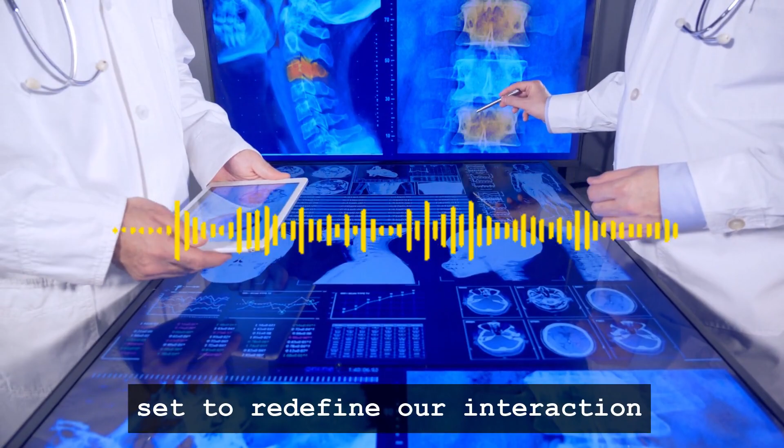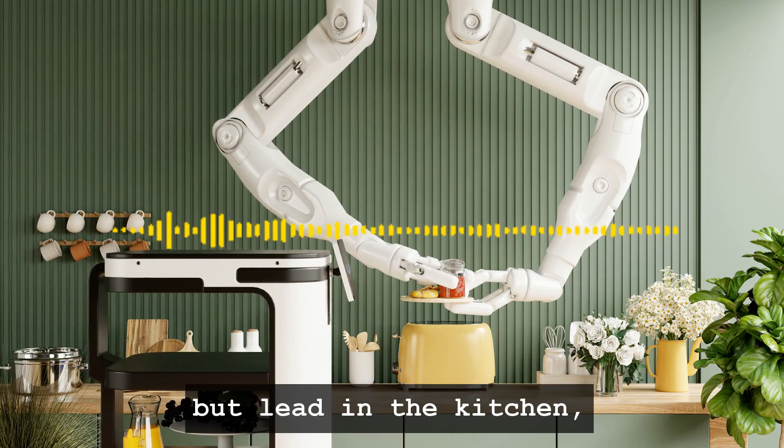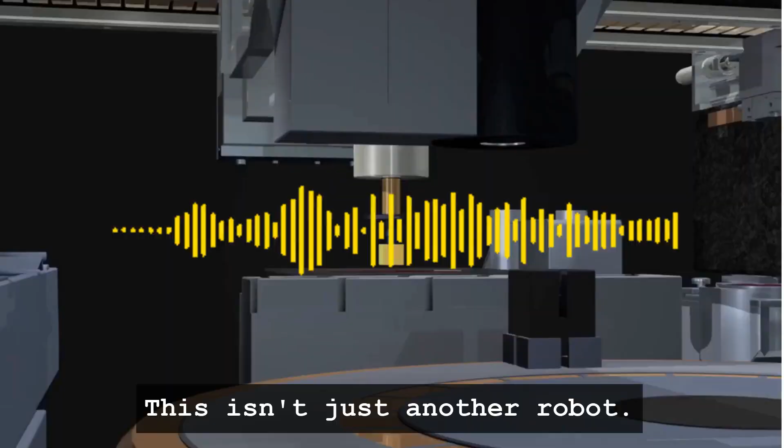Imagine a world where robots don't just assist, but lead in the kitchen, effortlessly preparing meals with precision. Today we're unveiling a groundbreaking project by student researchers from Google DeepMind and Stanford University. This isn't just another robot. It's a glimpse into a future where machines can do what was once thought uniquely human. Stay tuned as we unveil the Mobile Aloha, a robot that's cooking up a storm in the world of AI.

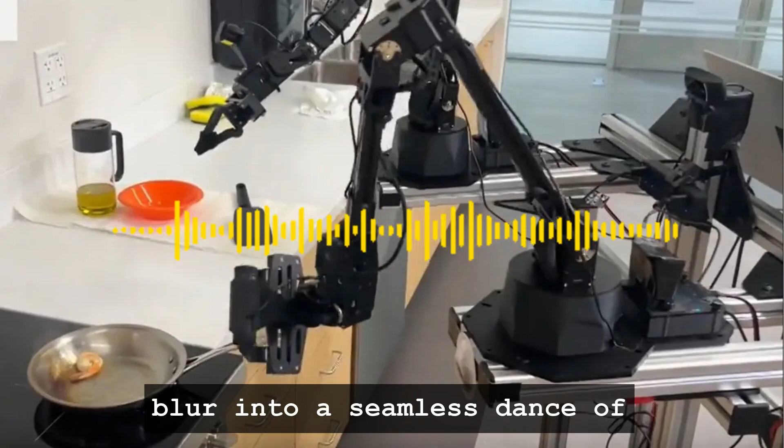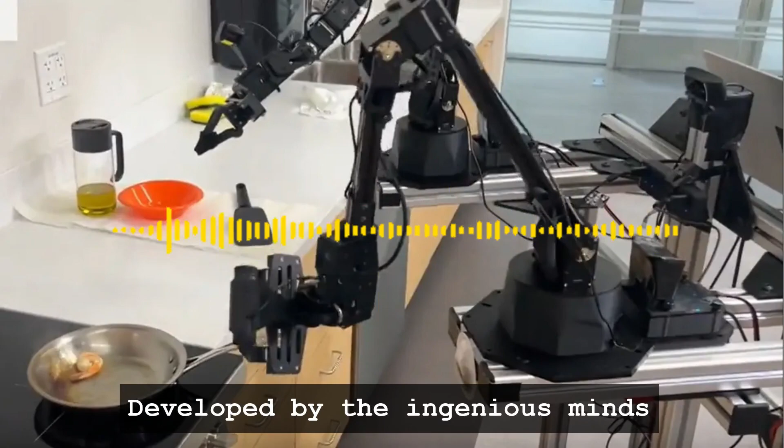Imagine stepping into a world where the lines between human dexterity and robotic capability blur into a seamless dance of innovation and efficiency. This is the world of Mobile Aloha, a groundbreaking project at the forefront of robotics and AI, developed by the ingenious minds at Google DeepMind and Stanford University.

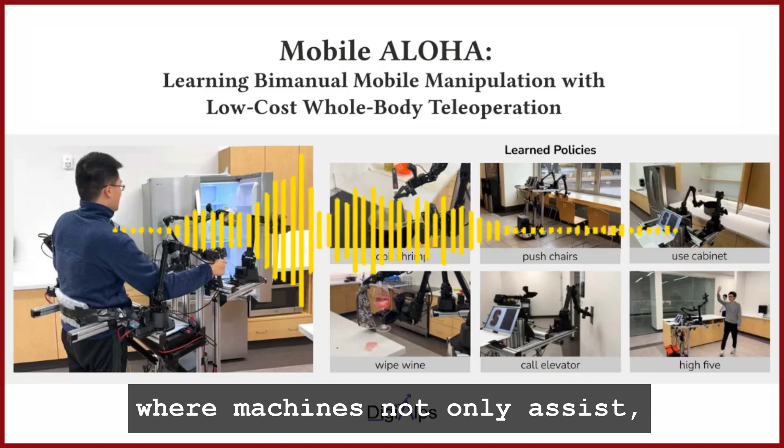Mobile Aloha isn't just a robot, it's a harbinger of a future where machines not only assist, but also lead with precision and grace. The genesis of Mobile Aloha lies in the collaborative efforts of Google DeepMind and Stanford University.

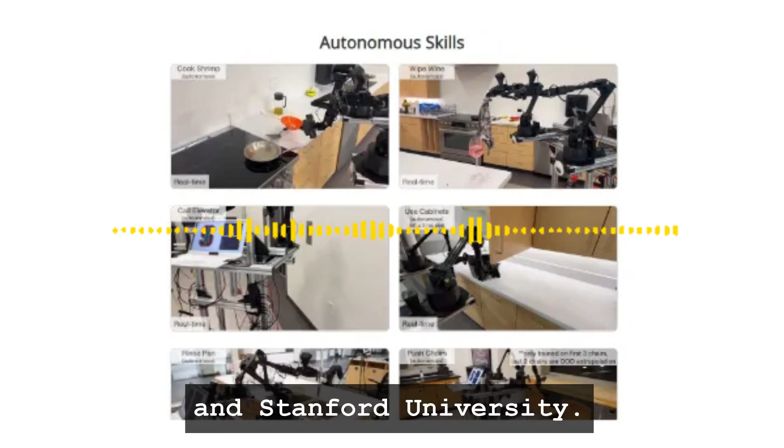This project is the brainchild of a team of visionary researchers: Zipeng Fu, Tony Zhao, and Chelsea Finn. Each member brings unique expertise and insight, merging the realms of AI learning and robotic agility. Their collective endeavor has given birth to a machine that redefines the boundaries of technological possibilities.

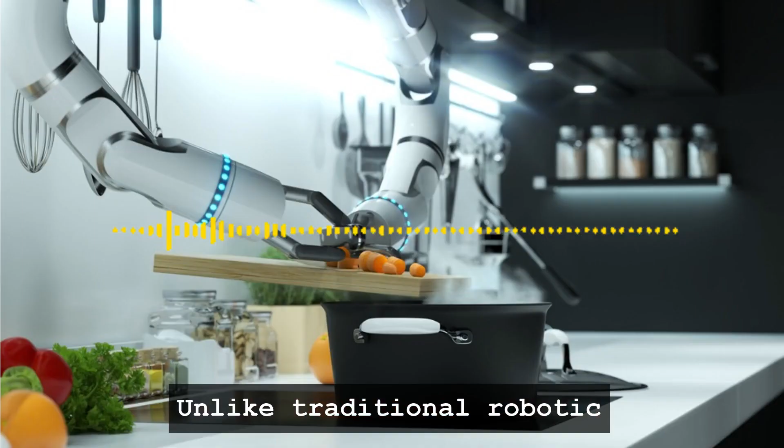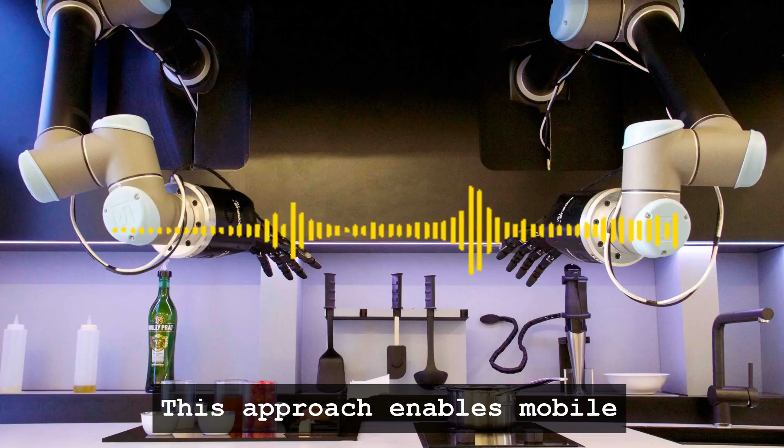Imitation learning is the backbone of Mobile Aloha's learning process. Unlike traditional robotic programming that relies on rigid commands, imitation learning introduces a dynamic where the robot observes and assimilates human actions. This approach enables Mobile Aloha to not just replicate human actions, but to understand and adapt them, bridging the gap between robotic obedience and human-like spontaneity.

The brilliance of Mobile Aloha is further amplified by its co-training methodology. It's akin to a chef learning from both a basic cookbook and a gourmet guide, mastering the culinary art in its entirety. Mobile Aloha's training involved learning from basic tasks performed in a stationary position, then advancing to more complex tasks that required mobility and coordination, just like a seasoned chef moving around a bustling kitchen.

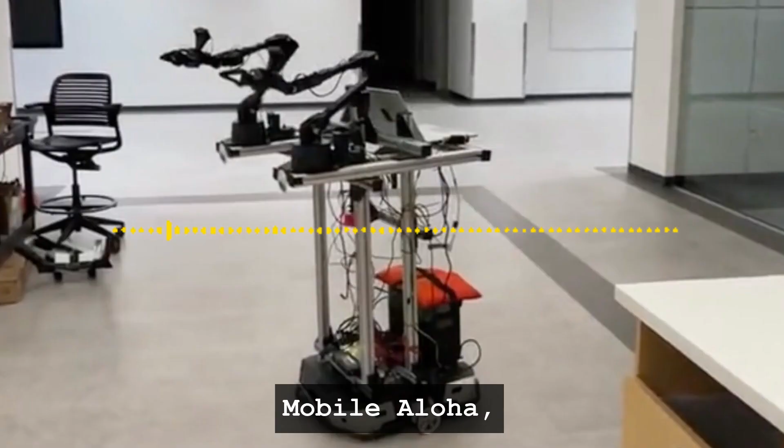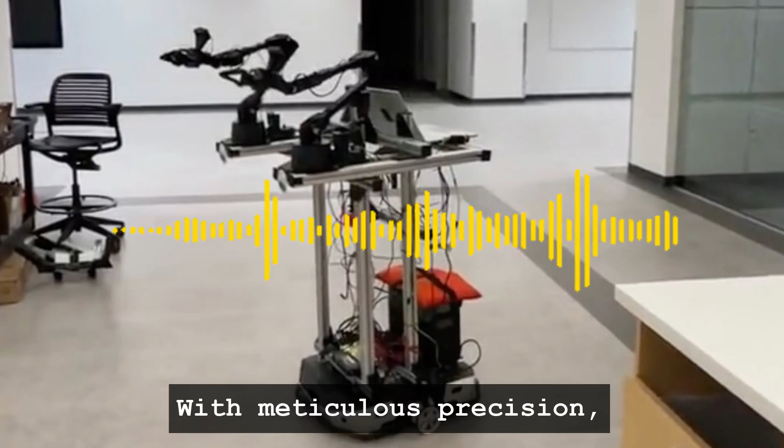Mobile Aloha is a marvel of engineering, boasting features that set new standards in robotic technology. Its advanced sensor arrays and articulated joints allow for an unprecedented level of task execution with meticulous precision. These high-tech features empower the robot to handle complex tasks, showcasing a level of dexterity that rivals human capabilities.

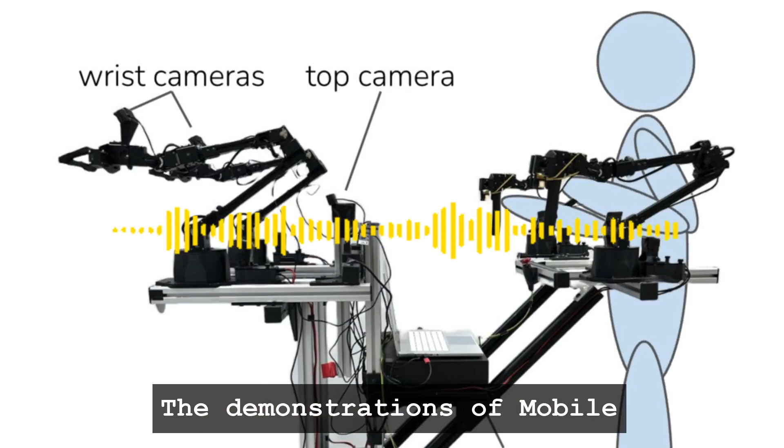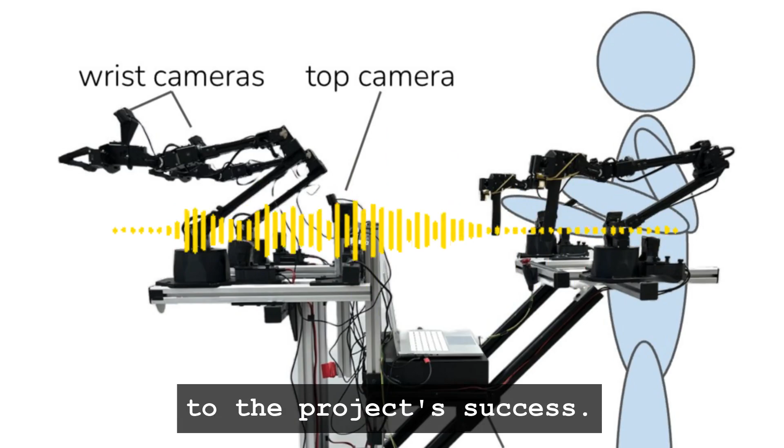The demonstrations of Mobile Aloha's capabilities are nothing short of remarkable. From expertly cooking shrimp to deftly navigating a kitchen, its performance is a testament to the project's success. Each task performed by the robot exemplifies its adaptability and precision, marking significant achievements in the field of robotics.

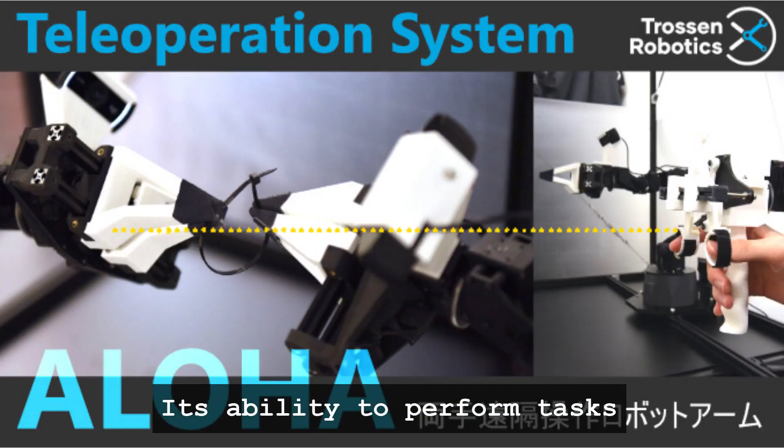The technological innovations embedded in Mobile Aloha mark a significant leap from previous robotic models. Its ability to perform tasks with human-like dexterity and intelligence showcases the immense progress made in robotic technology, setting a new benchmark for future developments.

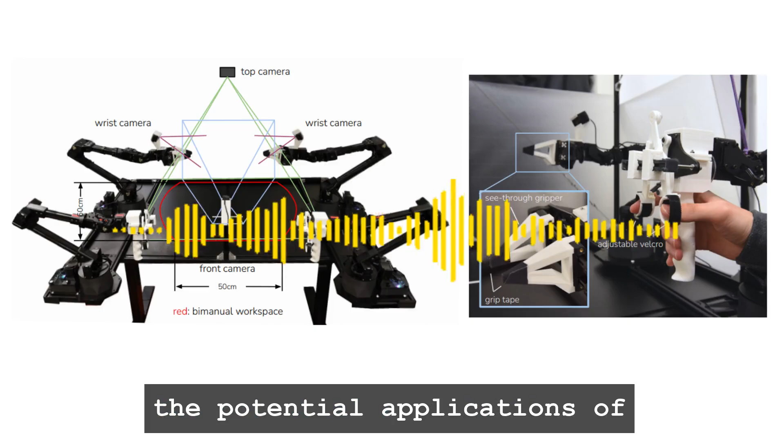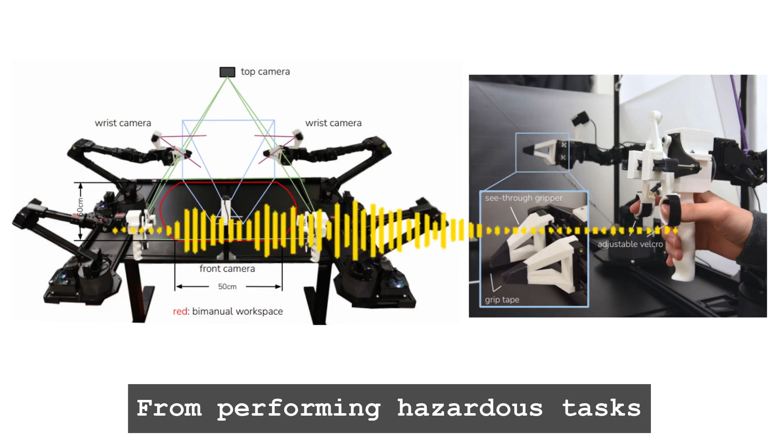The potential applications of Mobile Aloha are vast and varied. Its versatility opens doors to numerous possibilities in different sectors. From performing hazardous tasks in industrial settings to assisting in domestic chores, Mobile Aloha stands to revolutionize the way we interact with machines in our daily lives.

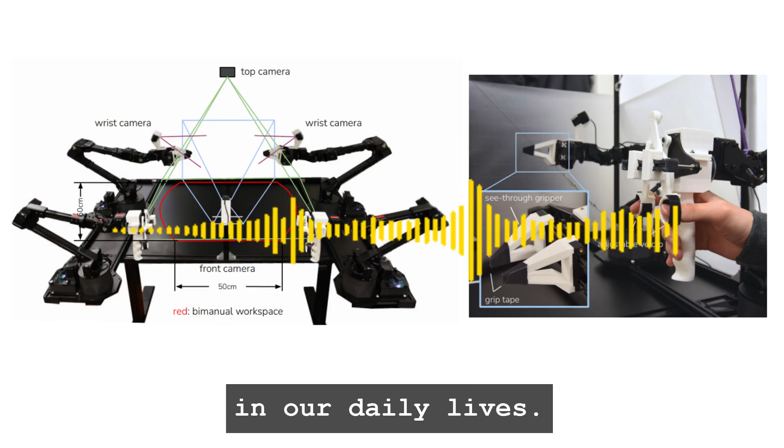Despite its groundbreaking achievements, Mobile Aloha is not without its challenges and limitations. Issues such as size constraints and limited reach in certain tasks pose challenges that the team is actively working to overcome. Future iterations of the project aim to address these limitations, making the robot more adaptable to various environments.

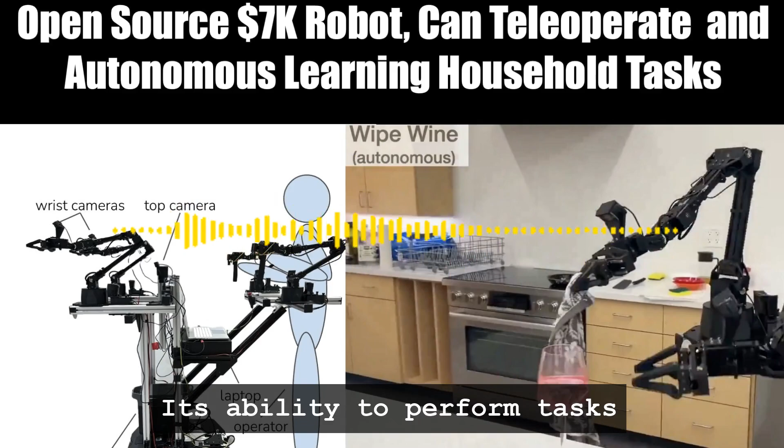The introduction of Mobile Aloha into various industries could have transformative effects. Its ability to perform tasks with high efficiency and precision could revolutionize industries by enhancing safety and productivity. The economic and social impacts of such a technological integration could be profound and far-reaching.

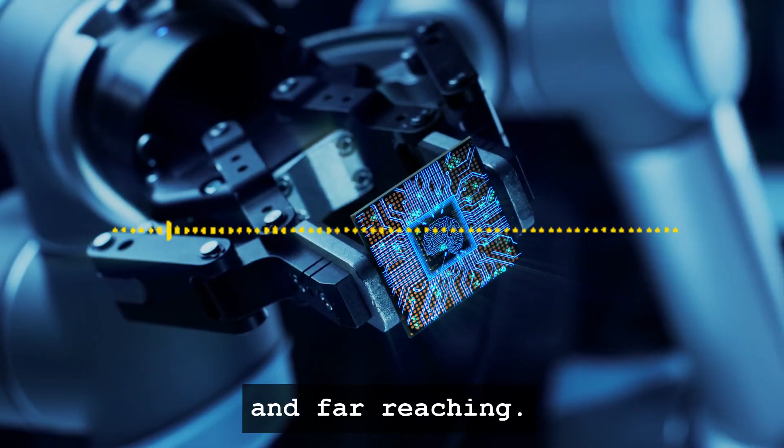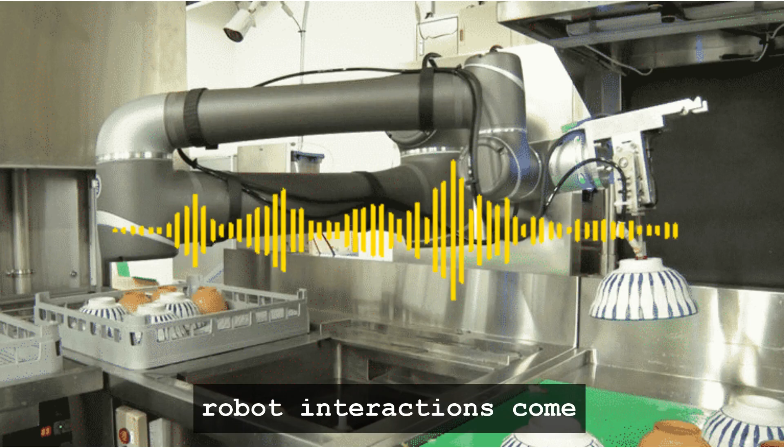The advancement of robotics, as exemplified by Mobile Aloha, brings with it a host of ethical and societal considerations. Issues around job displacement, privacy, and the changing nature of human-robot interactions come to the forefront. These considerations are critical as we navigate the evolving landscape of AI and robotics.

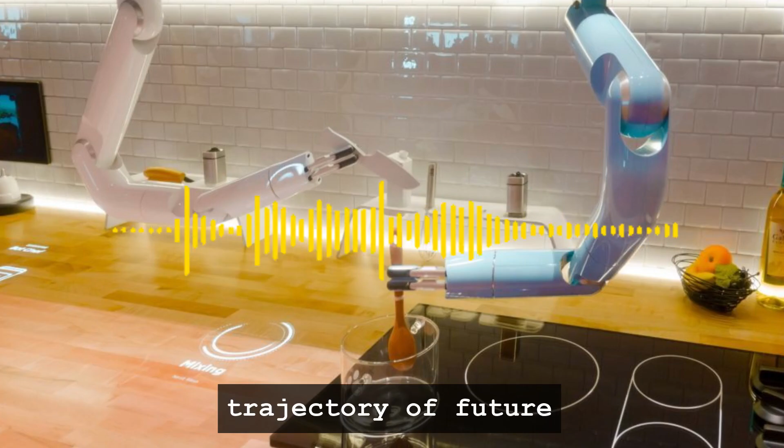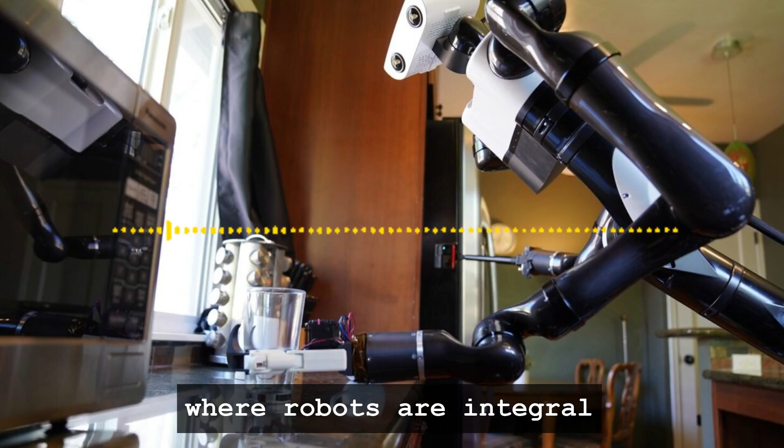Mobile Aloha not only represents the current pinnacle of robotics, but also signals the potential trajectory of future developments in AI and robotics. Its contributions lay the groundwork for further advancements, painting a picture of a future where robots are integral to our daily lives, enhancing our capabilities and experiences.

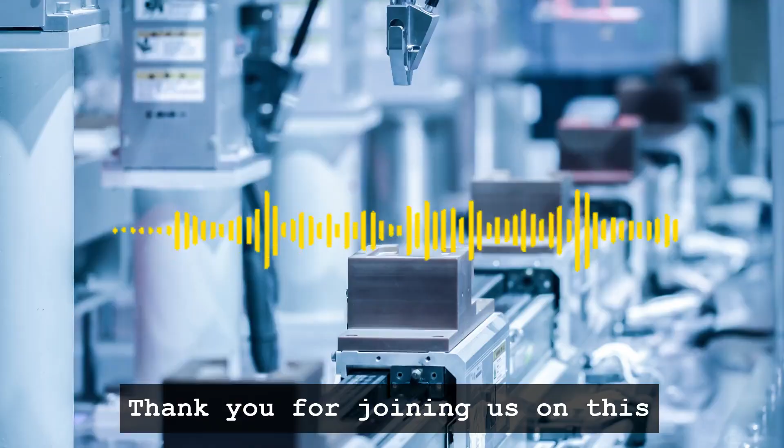Mobile Aloha is more than a technological achievement. It's a beacon of the future, illuminating the path towards a world where AI and robotics seamlessly integrate into our lives. As we stand at this juncture, the possibilities are limitless, and the future of AI and robotics is bright with promise and potential.